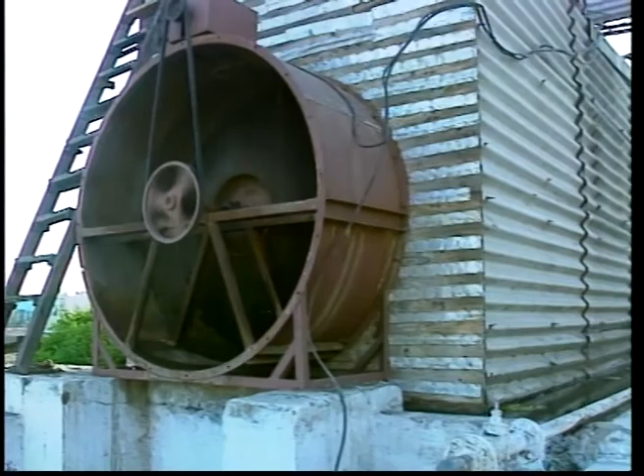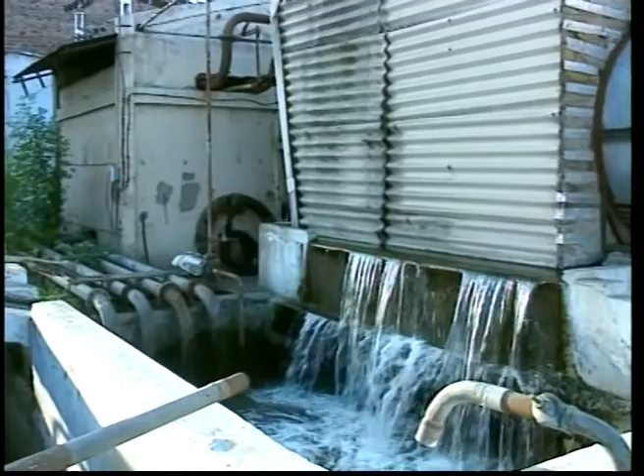The demand for water has only increased with the modern lifestyle and the present-day industrial requirements. In other words, water plays a pivotal role in all walks of life. Ancient civilizations flourished beside perennial rivers, and even today, urbanization, agriculture, and industrial development are found close to natural or man-made water sources like rivers, streams, and tanks. The availability of water is an index to the development of an area.

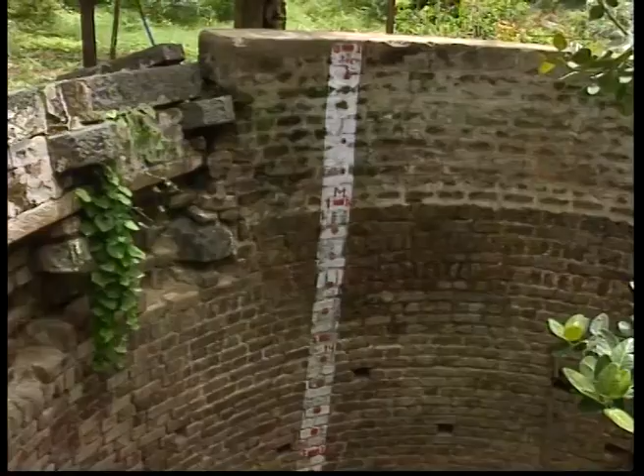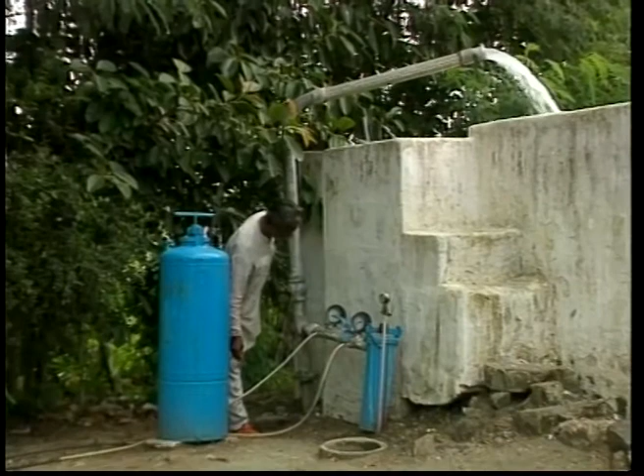In peninsular area, aquifer groundwater has been overexploited. The same is the case with the water from rivers and reservoirs. Hence, the hot summer months are a period of trial for the urban and rural people, the wild and domestic animals, as well as plants. Groundwater reserves are overexploited when people draw out more water than has been replenished in that year's monsoon. This imbalance has made the availability of water from the deep aquifers in the summer months even more difficult.

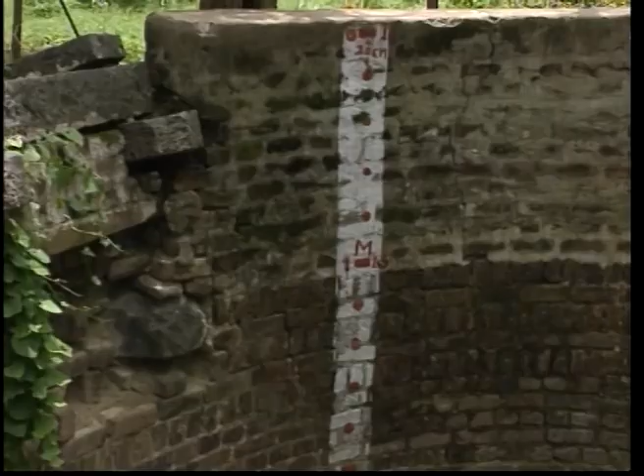Water is available on the surface in rainy season. During this period, it should be collected and conserved. National water policy too has emphasized the need for conservation of this scarce and priceless resource. In central and southern India, a steep decline in the availability of groundwater is a major problem. The solution for this problem is to adopt integrated techniques of artificial water recharging and conservation of ground aquifers. In this region, rainwater is the only source of water, and it is available only in the 2-3 months of the monsoon season in a year.

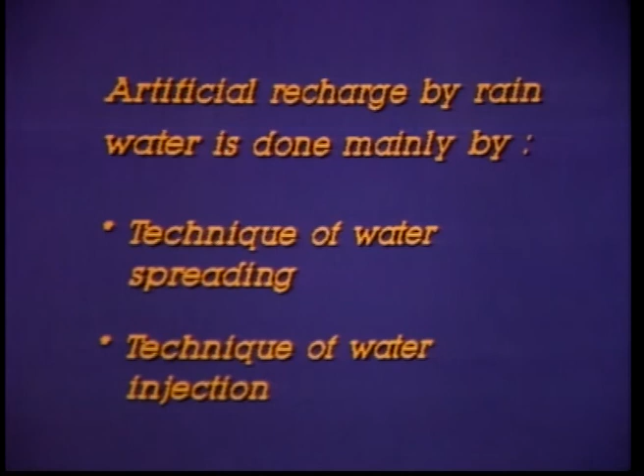Two main techniques of speedy artificial recharge of groundwater or aquifer by rainwater have been adopted: technique of water spreading, and technique of water injection. The water spreading technique being adopted on a large scale in Madhya Pradesh is known as the Indore method of water conservation in and around fields. For conserving rainwater in and around cultivated fields, bunds of 50 to 70 centimeter height are made around 1 or 2 hectares of land.

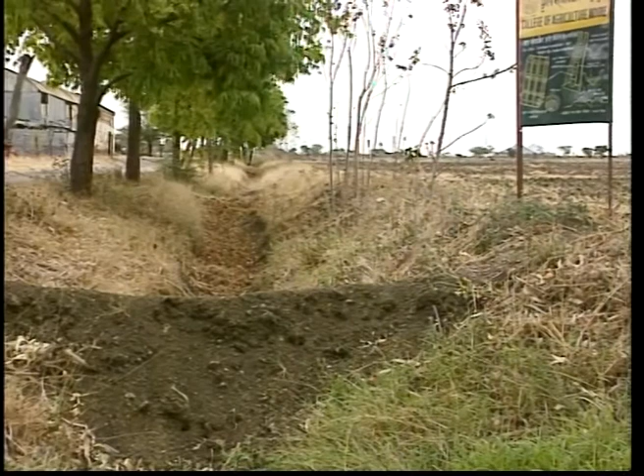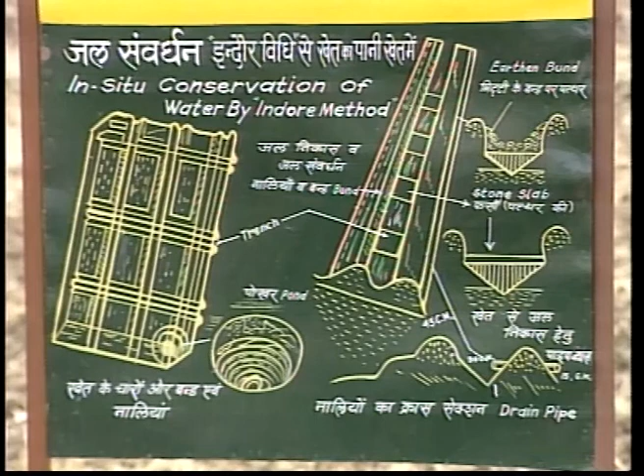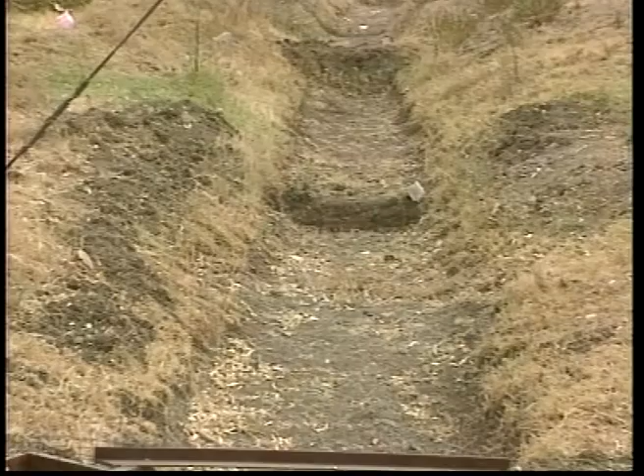Soil for the bund is obtained by digging a trench along the bund line with a depth of 50 to 70 centimeters and a width of 60 to 75 centimeters. Depending on the slope, 1 meter length area is left undug at a distance of 30 to 35 meters to serve the purpose of a bund in a trench to help impound or hold water in each section. Moreover, at the center of the trench, a deeper pit is made, exposing subsoil or muram through which water percolates down to accumulate in groundwater reserve.

Runoff water from the fields which collects in the trench gets time for deep percolation so as to get conserved in the soil aquifer. Soil from the field brought by the runoff water gets accumulated in the trench and can be returned to the field during yearly cleaning and maintenance work. The Indore method of water conservation in this way helps to conserve soil, nutrients and organic matter in and around fields.

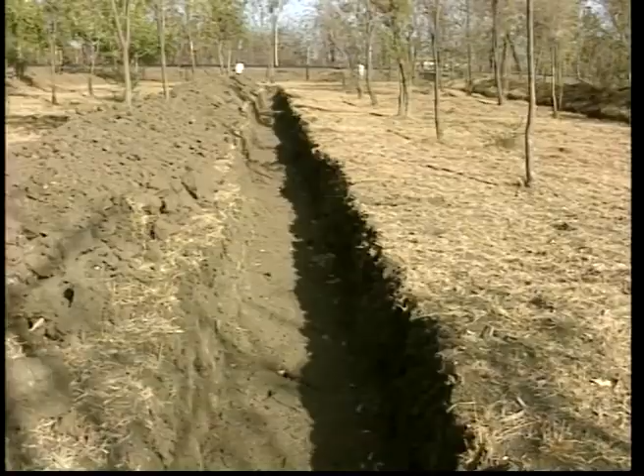To enhance the percolation of water into the soil, there should be a provision for trenches in afforested areas. A distance of 15 to 20 meters should be maintained between the trenches. On hillocks and slopy ground, digging of trenches along the contour is desirable. Trenches may be filled with available biomass and covered with soil. Biomass on decomposition serves the purpose of plant nutrition and also it is useful in wasteland development. Moreover, because of porosity, water percolates down.

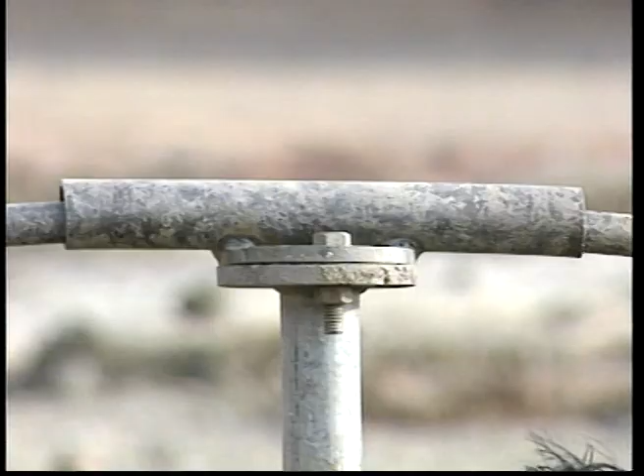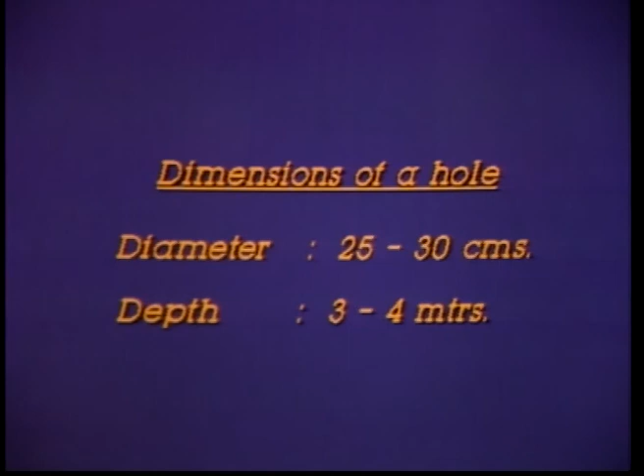In flat land area and in the strips along the roads, shallow saucer-like beds are useful in increasing water percolation. Swale not only increases water percolation but also accelerates the rate of growth of the plants. Certain industries at Dewas have successfully used the pile or column method in open grounds or parking places for artificially augmenting the rate of water recharge. Round holes of 25 to 30 centimeter diameter and a depth of 3 to 4 meters are bored by an auger at a distance of 3 meters.

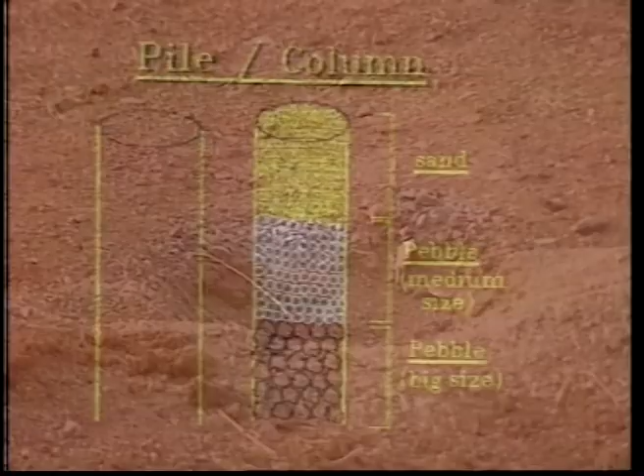1/3 portion of these piles is filled with coarse pebbles. The middle portion is filled with medium-sized pebbles of 2 to 3 centimeters. And the upper 1/3 portion is filled with bajri. Rainwater collected in the ground percolates down at a faster speed without any obstacle to get accumulated in the aquifer. Piles or columns are useful in augmenting the percolation rate of water from areas where the soil has become compact and also from areas where silt has accumulated.

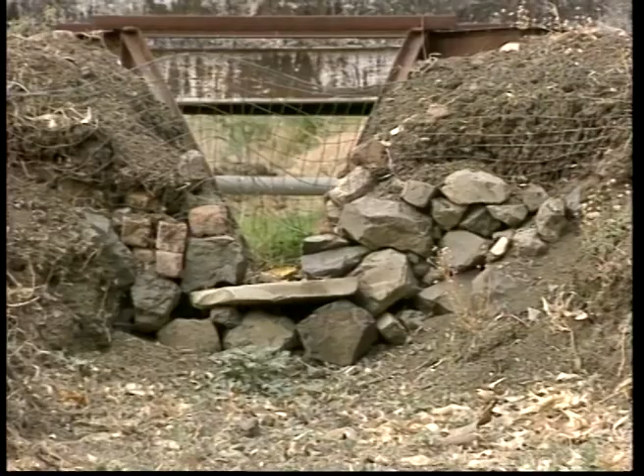It is necessary to collect the rainwater of a particular area in its own watershed on the surface or in the aquifer of that place. It is possible to achieve this objective. College of Agriculture Indore and Wheat Research Station Indore have taken up bunding in drainage channels or trenches. We can deepen the nalas by cleaning them and using the soil, boulders and muram found in them to make check dams.

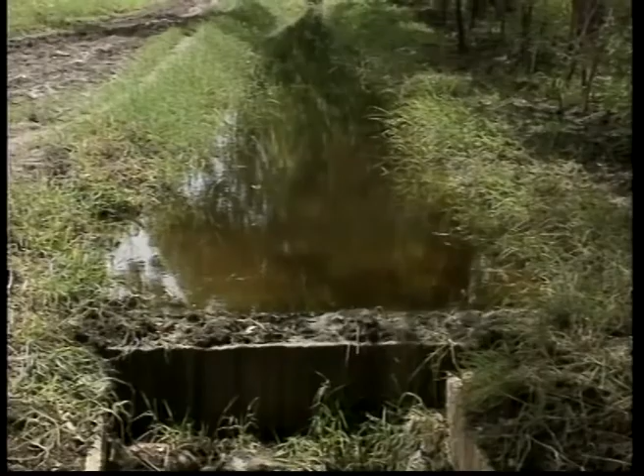The velocity of the flow of water can be checked or brought to zero velocity by check dams at regular intervals. If at a particular point water velocity is high, at that point a stone slab or boulders and a wire net are used. By this simple and cost-effective technique, it becomes possible to conserve field and village water on the surface in the trenches or nalas, which gradually percolates down to aquifer reserves. Adoption of this technique has registered a 3 to 4-fold increase in water output from wells and tube wells.

Rainwater from a watershed flows out from a point to join a river. To keep a village's water in that village itself, old ponds and tanks should be maintained and fresh tanks should be dug. By the adoption of this technique on a large scale, it has been possible at several places to maintain the groundwater table. At the same time, conservation of water on the surface for a longer time keeps the environment humid and makes water available to wildlife, birds, and aquatic creatures.

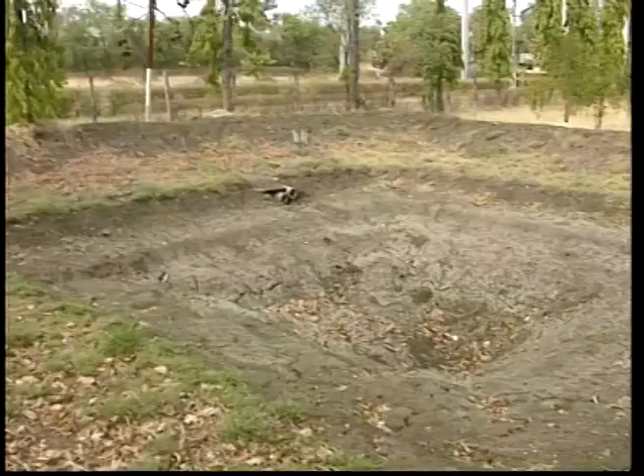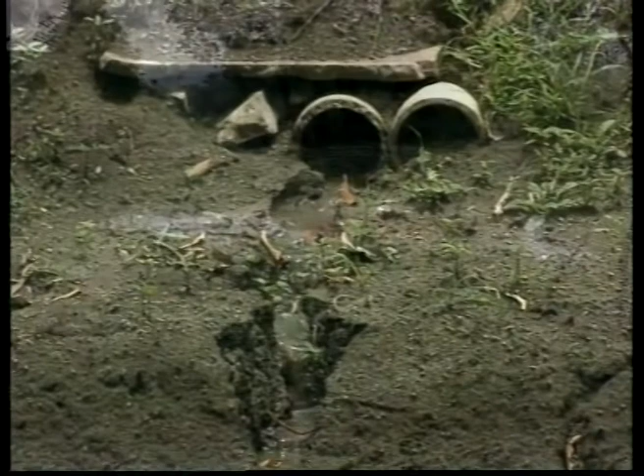In the peninsular region, several thousand dug wells are available. If these wells are utilized for collection of rainwater, then we can increase the availability of groundwater. For that purpose, we have developed an indigenous technique of groundwater recharge through dug wells. This technique comprises channelizing the runoff water into a silt trap tank, trap filter of pebbles and biological filter of vetiver or khus fitted to the pipe leading to the well.

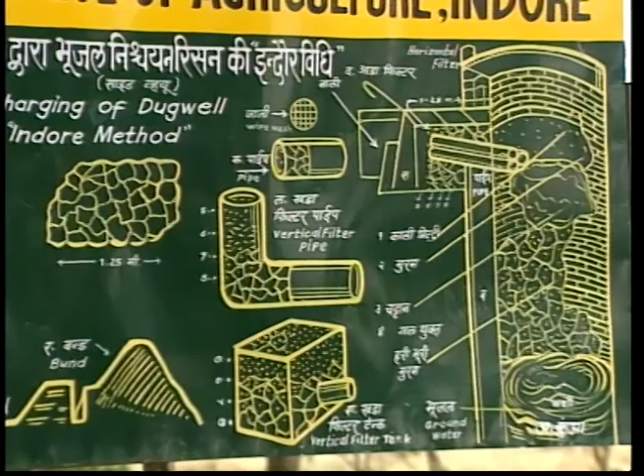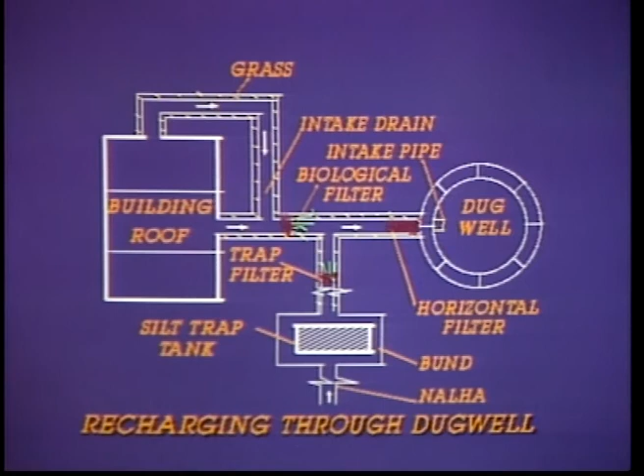The pipe is covered by a wire mesh over which a sand bed filter is provided. Water passes through the 3 to 5 millimeter size particle sand, which forms a layer of 50 to 75 centimeters, followed by layers of small, medium and big size pebbles, each 30 to 40 centimeters thick, to enter the well bottom from the top. The filter could be horizontal or vertical.

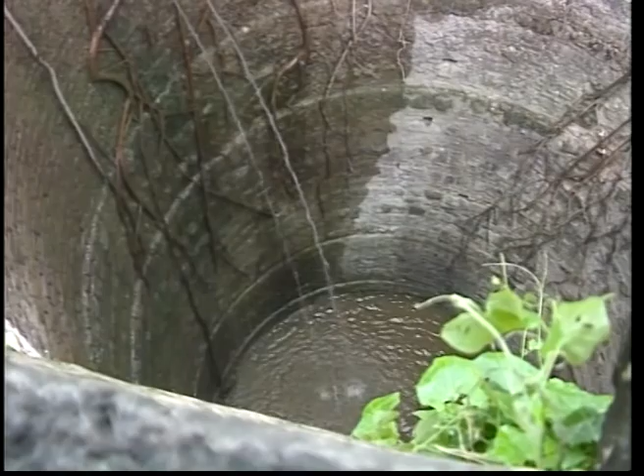Water directly enters into the groundwater aquifer, which raises the groundwater table and simultaneously revives and rejuvenates old wells by increasing the water availability 3 to 4 fold. The advantage of this technique is that the water entering the wells is free from pollutants and is fit for irrigation and potable purposes.

In the basaltic region, groundwater recharge is a problem because there are various layers of weathered and basaltic rocks which are very hard and impervious to water, and water cannot penetrate deep into the aquifer. The only way out is to make use of tube wells for recharging during the monsoon or rainy period. It can be done by various techniques. The major techniques are roof water harvest to fill tube wells, tube well perforated casing pipe with filter, and tube well recharge by injection method.

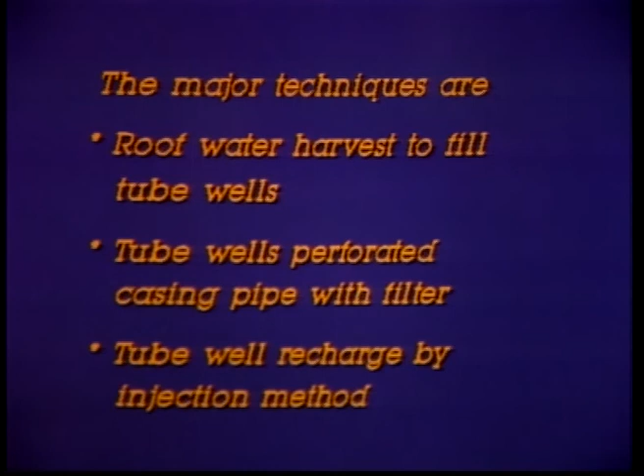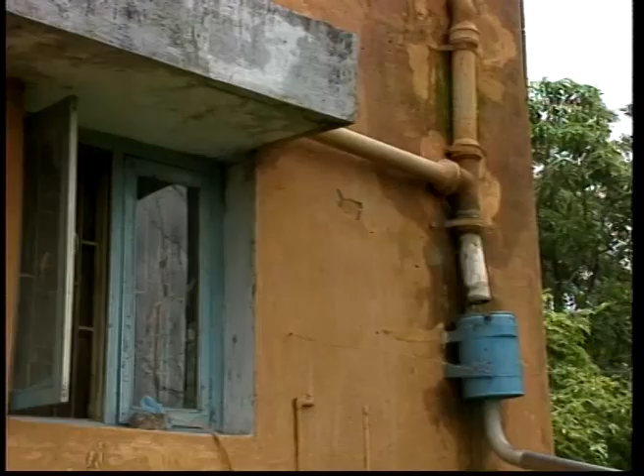Underground reservoirs are an ancient heritage of Kutch, Gujarat and Rajasthan. The rainwater collected or harvested from the roof is filled into the tank. This method has been revived at the College of Agriculture, Indore, and by the industrialists of Dewas and Manglia near Indore. Roof water from residential areas, office buildings, and godowns is collected and channelized through pipes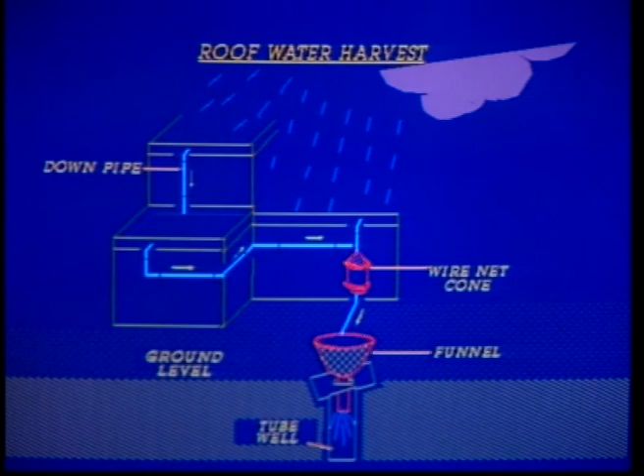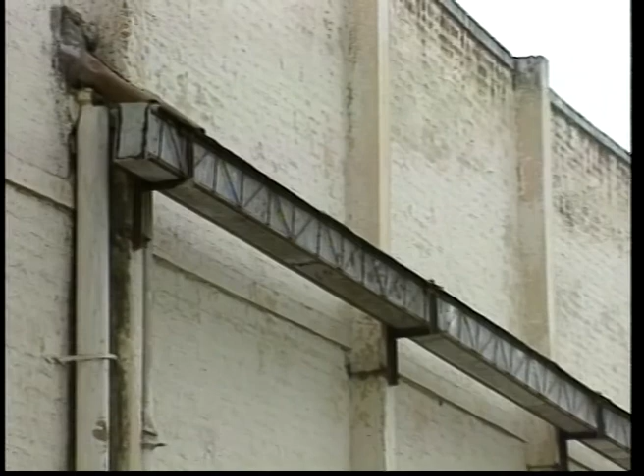passing through filters of nylon net and glass wool and allowed to enter directly into tube wells or wells and the deep aquifer strata. Hydraulic pressure created by the water column is useful in the percolation of water into the deeper strata of the aquifer. From the second shower onwards, rainwater is the purest and free from pollutants, and it is as good as distilled water. In industrial areas, pollution is a problem. To keep groundwater free from pollutants, the use of roof water to artificially recharge deeper aquifers is the best strategy.

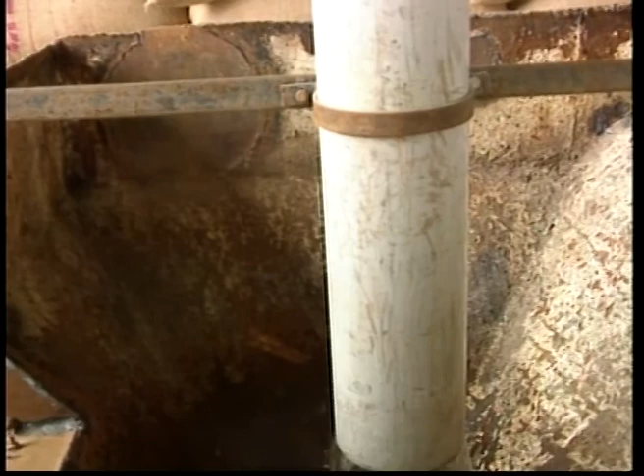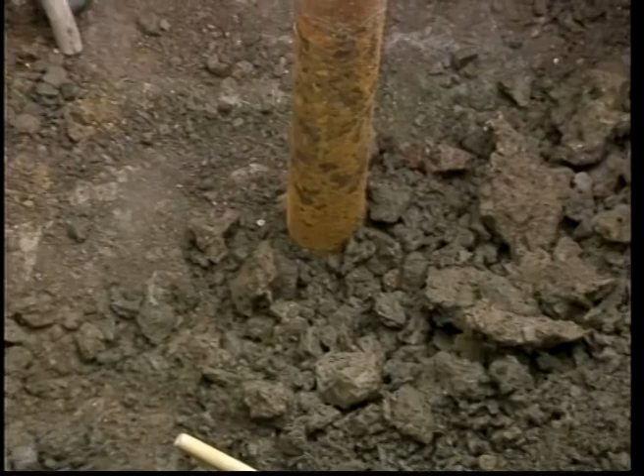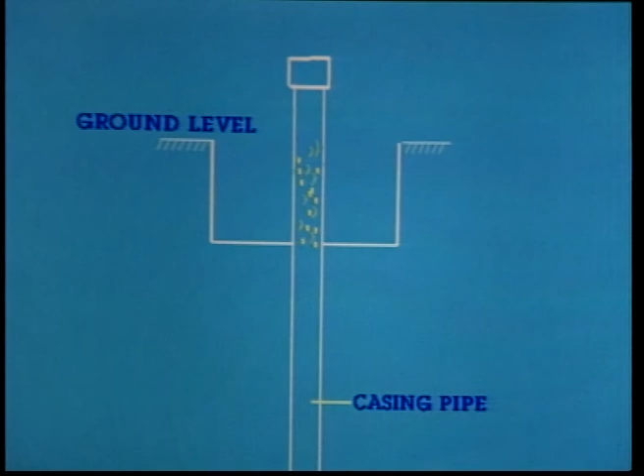A cylindrical pit of 3-meter diameter and 3 to 4-meter depth is dug around the tube well casing pipe. In the casing pipe, holes of 8 to 10 millimeter size at a distance of 3 to 4 centimeters are drilled. Alternatively, an old casing pipe is cut, and at the cut end, a perforated pipe with additional holes is welded. On the perforated casing pipe, coir rope is wrapped, which serves the purpose of a filter. The coir rope needs to be replaced once in 2 to 3 years.

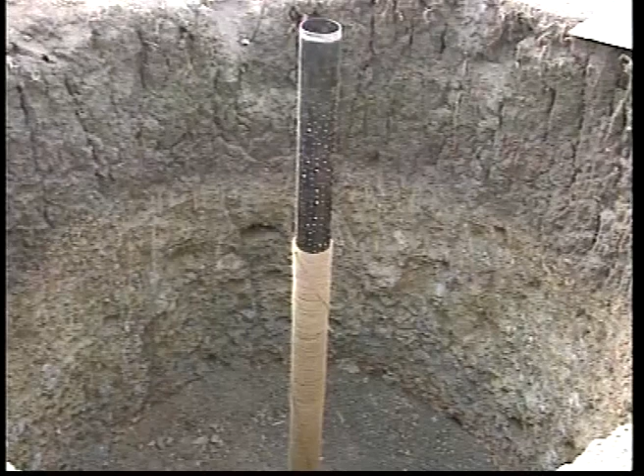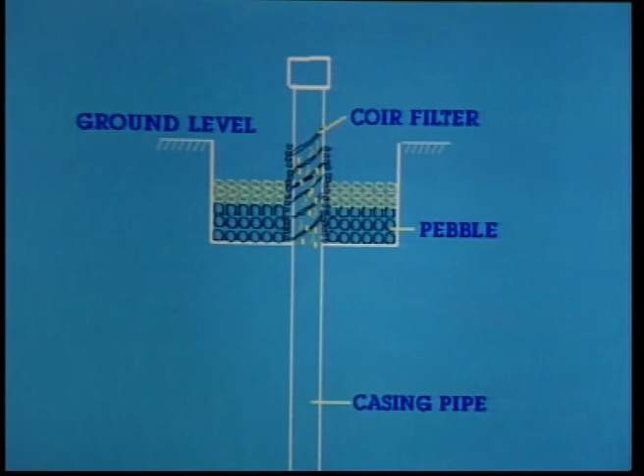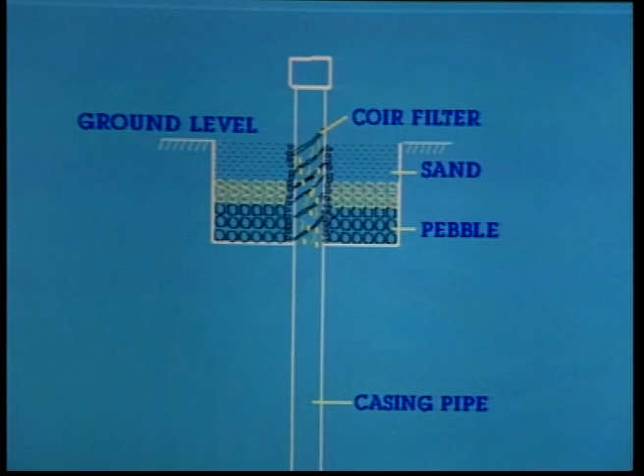In the pit around the casing pipe, pebbles of 30 to 40 millimeters are filled in the lower 1/3 depth, followed by medium-sized pebbles of 15 to 20 millimeters up to 2/3 depth. In the upper 1/3 portion, sand of 2 to 4 millimeter size is filled. Runoff water accumulated around the tube well passes through the sand bed filter and finally enters the tube well bore through the coir filter, directly reaching the deep aquifer strata to recharge it. Water used for recharging should be free from pollutants, chemicals and biotic biomass, or else it adversely affects the quality of water.

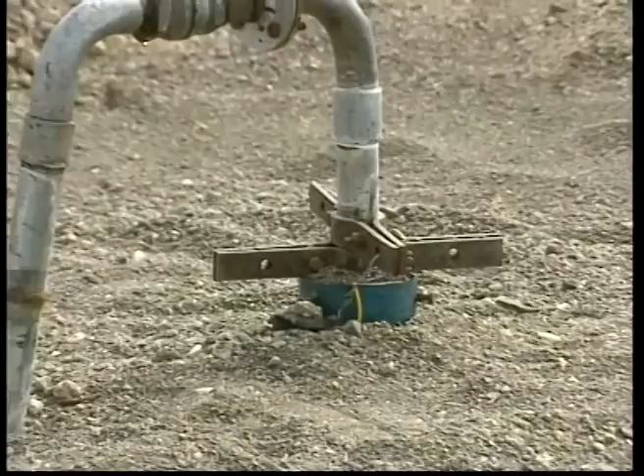Pure water from rivers and wells free from colloidal suspension could be pumped or injected into the tube well deep aquifer with the help of a motor pump and a pipe reaching up to 50 to 60 meters depth. It may be used depending upon the location and at places where the groundwater has been overexploited.

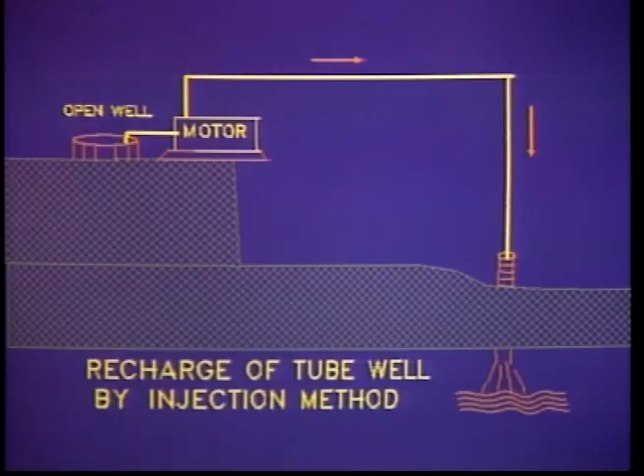Gradual environmental degradation has been found to adversely affect average rainfall, and at the same time soil erosion too has affected water holding capacity and water conservation potential in several areas. Overexploitation and sole dependence on deep aquifer reserves has resulted in a steep decline in the water table level in several regions of the country. To raise the groundwater level, conservation of water in and around the fields and impounding of village water in a village is essential. A package of artificial recharge techniques needs to be adopted in the peninsular basaltic region of Gujarat, Maharashtra, Andhra Pradesh, Karnataka, Tamil Nadu, and Madhya Pradesh.

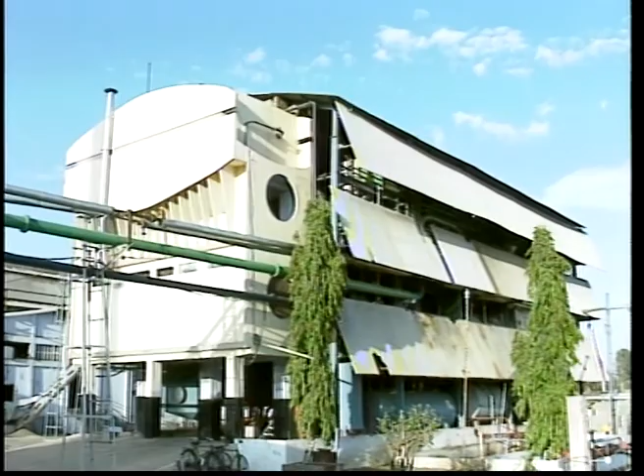In fact, this is the urgent need of this modern era, for if nature's precious gift is conserved and used judiciously, every farmer and his farm located in rain-fed farming areas can get the benefit of development, and at the same time an adequate quantity of water can be spared for industrial use. To achieve this goal, our strategy should be to seek greater public participation. Plenty of quality water available all the year round alone can keep our planet Earth green and safe for living beings.